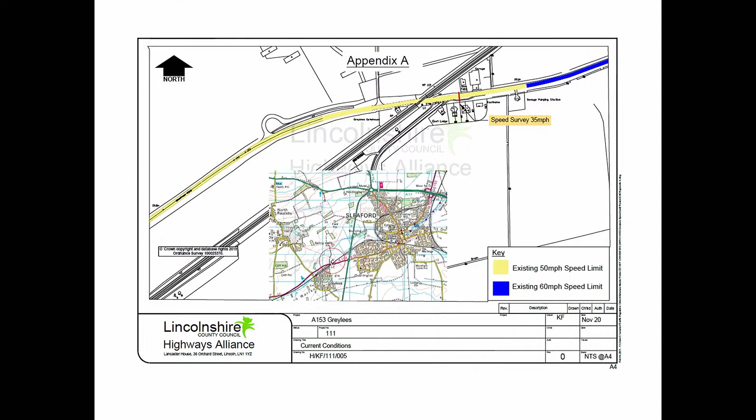Members and the previous committee may remember we brought a paper in February to look at a borderline case for this 30-mile-an-hour limit, where we'd established a mean speed of 35 miles per hour. This committee approved the 30-mile-an-hour limit as shown at Appendix B as a borderline case, and we subsequently went out to consultation. We received one objection to the proposed 30-mile-an-hour limit, based on feeling that the limit was inappropriate for the area, that additional signing would be in the area, and also that it would be too short to enforce.

In response to that, we've been able to justify this 30-mile-an-hour limit against both the rural policy and via the mean speed. There's been a number of accidents here, and we hope that this 30 will reduce the incidence of these. The signage will be limited, as we're not permitted to use 30-mile-an-hour repeaters in a street-lit area.

I think it is the minimum length required for police enforcement. So the recommendation in the report is that the committee overrules the objection so that we can advertise this proposal.

Thank you. As always with the committee, I assume that members have read the reports prior to coming to meetings. One or two questions might have been asked at various points, so it does help people with the decision making. I don't know if anybody wants to speak to the reports. I'll just have a quick look round. I can't see anybody burning to make their maiden speech. So from the chair, then, I'm going to propose that we accept the report as printed.

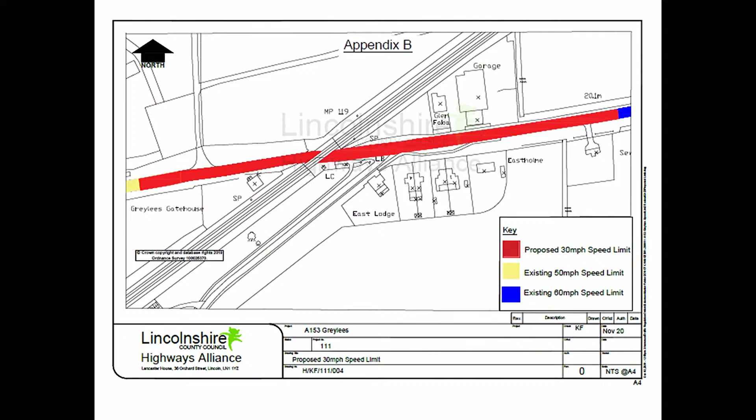Chairman, I'm happy to second that. Thank you very much, Councillor Pepper. I am healthy. Allegedly. Okay, thank you. So it's now seconded by Councillor Pepper.

I will therefore put it to the vote. All in favour, please show now. A quick look round shows that's unanimous, but I will ask if there is anybody against or any abstentions, just for the sake of completeness. Thank you. So that's all for that one.

So I'll move you on to the next report, which is 4.2, Tattershall Thorpe, the B1192, a proposed speed limit reduction on pages 19 to 26. We're just going to revive the PowerPoint presentation in the chamber. So there's a little pause here.

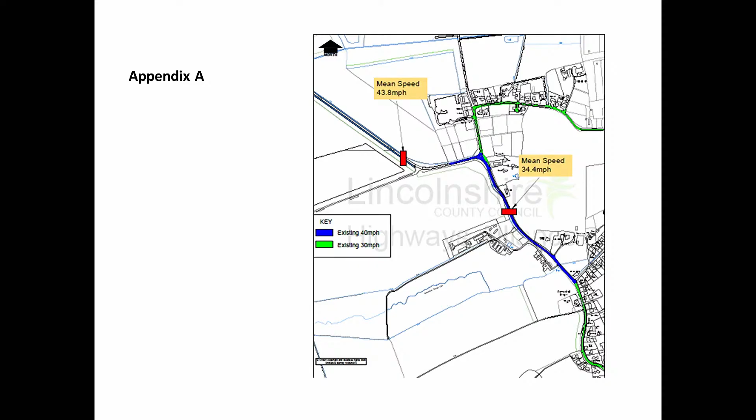So we're proposing that the existing 40 is reduced to 30 and the existing unrestricted length is reduced to 40. This will be subject to the approval of this committee. So the recommendation is that the committee approves these reductions as borderline cases so that we can proceed with the consultation. Thank you very much.

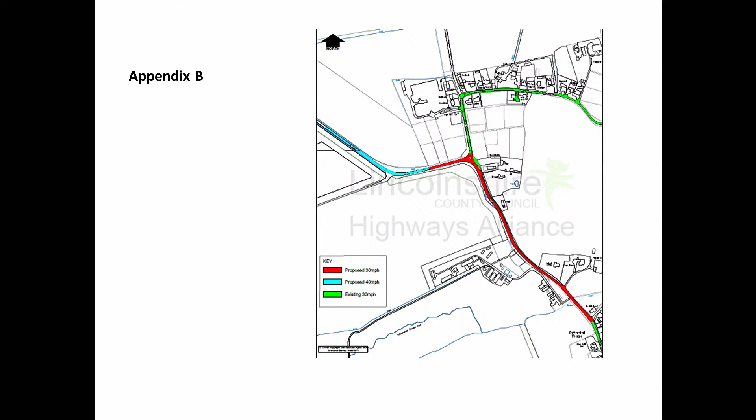So I'll open it to committee. Vice Chairman, would you like to speak to this one? Yes, thank you very much. I think this is an incredibly welcome proposal that we have on the table here. I am the local member for Tattershall, and I appreciate this is something that has come up from time to time with the local communities there.

It builds on the work that we've already done looking at linking the speed limits at the south of the village and just tying all of that up so that speed limits genuinely make sense, that you're not constantly yo-yoing. Looking at the way that this works as you come in from the north, slowing that traffic down as it approaches those first bends with that quarry access there, I think makes an awful lot of sense, and I'm very happy to move the paper, Mr. Chairman.

Thank you. I represent an area adjoining your area, and I know this road very well, so I also can support this speed limit reduction, so I'm quite happy to second. However, would anybody else like to speak to the report?

Councillor Reid. Thank you, Chairman. Just like you good people, I'm very familiar with this particular area, going to Woodhall Spa, and I would just endorse exactly what's being asked. But I think it's good for us to be able to debate that we do actually know the areas that we're actually voting on. Thank you.

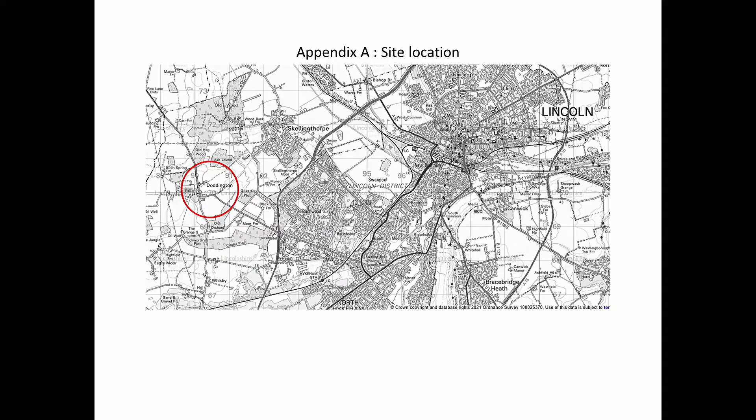This is a proposed puffin crossing at Doddington Village, which lies just to the west of Lincoln on the B1190. We had a request for a toucan crossing at this point. Doddington Hall is a very popular venue. It has an overflow car park across the road, which is very well used, and this generates quite a lot of pedestrian traffic across the road.

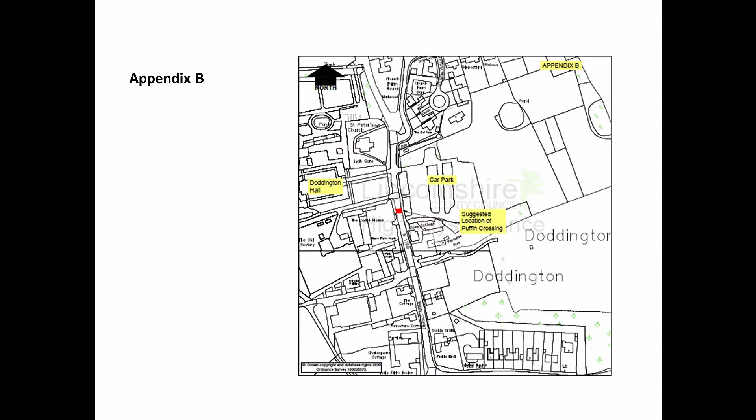So, following an initial assessment to identify the desire line, we identified this location as being the most likely place for a crossing facility and carried out the necessary survey. The survey result came in at 0.47, which just falls short of the 0.5 required for a pedestrian refuge. However, in the policy, members are able to sanction an installation if the score lies within 10% of the threshold required.

This being the case, a pedestrian refuge can be approved by this committee. However, there is insufficient space in the carriageway for a pedestrian refuge to be constructed to current standards without significant widening of the road, which will entail a lot of extra cost. So this committee is, in those circumstances, able to sanction an upgrade to a zebra crossing. However, at this location, the traffic flows are too high for a zebra crossing. So again, this committee is able to sanction an upgrade to a puffin crossing, which is push button variety, and therefore that is what is proposed at this location.

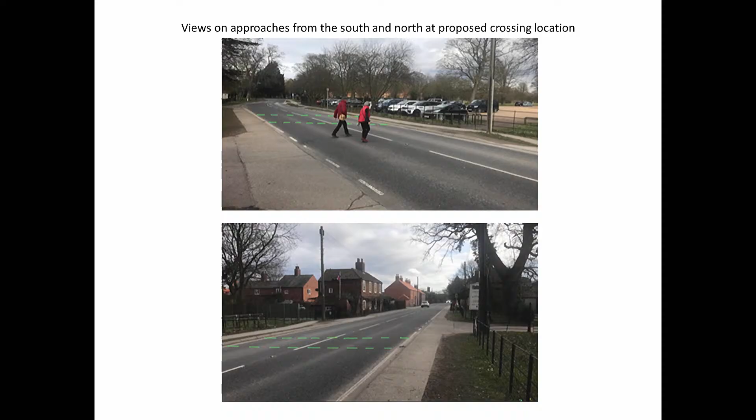So the recommendation is that the committee supports a bid for funding for the feasibility, design and installation of a puffin crossing at this location. Thank you. Thank you very much. I'll therefore open it to committee. Would anybody like to speak to the report? Councillor Reid, please.

Thank you very much, Chairman. Well, this is really good news. I'm sure there are many other people in this room campaigning for similar situations in different locations. But clearly we can see the advantages of having an upgrade to a puffin crossing or zebra crossing from a pedestrian refuge. It clearly makes great sense, and I think it's just a really good news story, and I'd encourage other members of a similar mind to recommend this. I think it's excellent, and I'm really, really pleased for this community. Thank you, Chairman.

I've seen this location both as a driver and also, I don't think I need to declare an interest, as a customer to Doddington Hall when I've been to various events at the establishment. I've seen the traffic coming through, so I've seen it from both a pedestrian aspect and a driving aspect, and I wholly support the recommendation. It goes forward, and that the consultation can be pursued with regard to this, so that the funding bid can be put together for the feasibility study.

Councillor Mrs Newton. Thank you, Chairman. I'm happy to second this recommendation. It looks as though it's good news all round. Rather than me second it, I thought I'd allow you to. Yes, no problem. So, would anybody else like to speak?

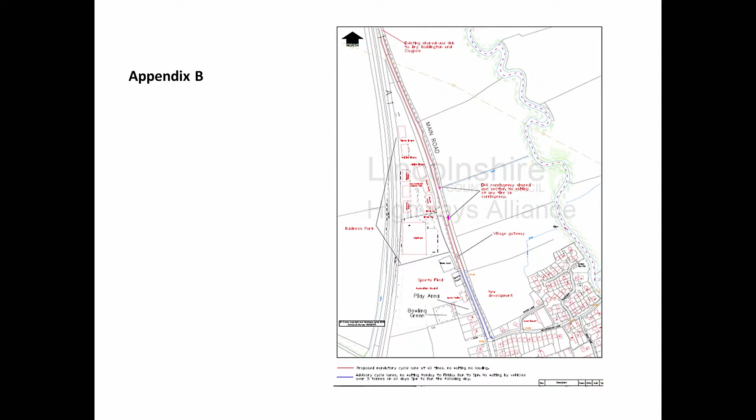Good morning, thank you Chairman. Yes, I'm speaking today in favour of the proposals that Jan has brought to the committee. The details of the scheme have been developed in close consultation with both the Parish Council and the Playing Field Management Committee, with an on-site meeting last year to agree the details before we went out to public consultation.

Importantly, the single yellow line that Jan referred to, proposed outside the sports facilities, will ensure that evening and weekend parking for visitors to those facilities is still possible. For daytime users of the facilities, parking would be possible south of Westborough Lane, which is only a short walk. However, the Parish Council and Playing Field Committee are exploring options for a limited number of off-street parking spaces in the future, so hopefully that reassures members about some of the objections.

As well as improving cycle links to neighbouring villages of Claypole and Dry Doddington, it also improves and connects the village to Newark Town Centre, which is our nearest town. And there is, of course, the added bonus that it will remove the dangerous overnight lorry parking from the north end of the village. Now, we have suffered for well over a decade 20 to 30 HGVs every night parking along the north end of the village and leaving high levels of litter and human waste in our village verges.

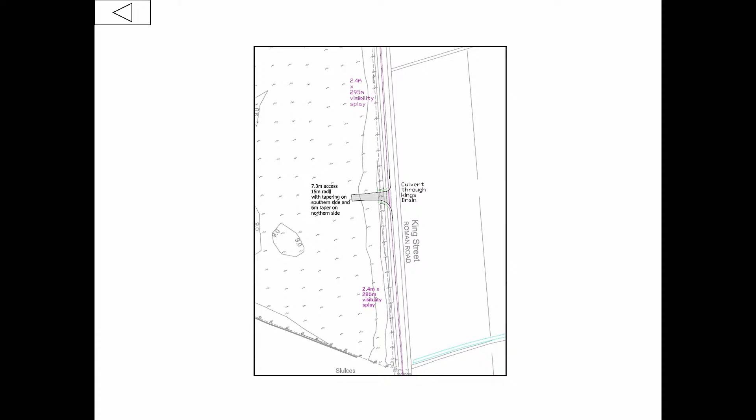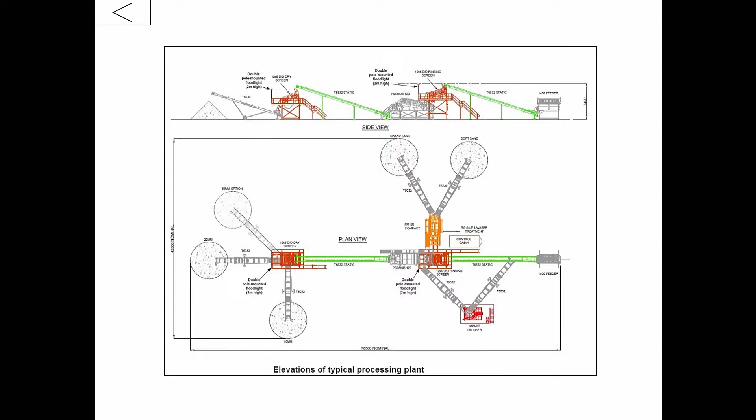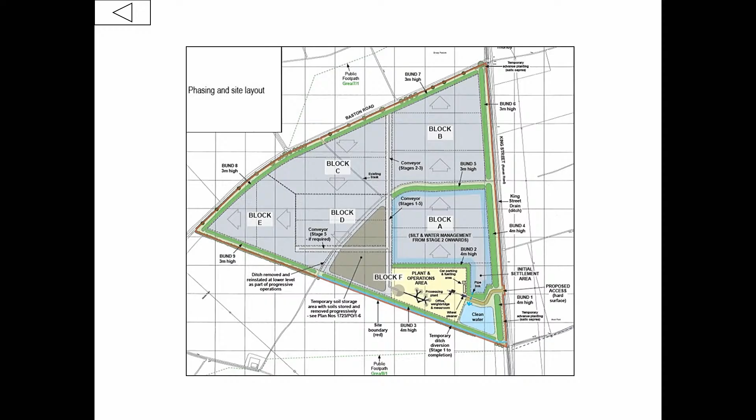In terms of publicity and consultation, I haven't got the page numbers on my report, so I'll refer to the paragraph numbers. Paragraph 14 sets out the results of the consultation and publicity, and you'll see at 14B that Greatford Parish Council have raised a number of objections to the application, in particular regarding traffic and safety along King Street, with their detailed concerns set out in the report.

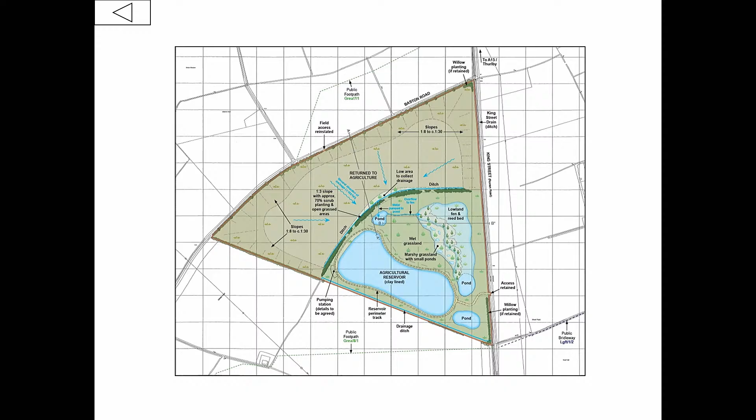Moving on from there, Barholm and Stowe Parish Council have also raised concerns about the traffic on King Street, and even with the additional information that has been provided, they still maintain their original objection. Following on from there, there's a list of other parish councils in the locality who also have made comments regarding the application.

Moving on, after the various parish councils identified in the report, you'll see that the Environment Agency have raised no objection to the application, subject to an informative. Importantly, the highways officers have confirmed that following the submission of further information, the highway officer requests that any permission granted by the planning authority shall include conditions relating to highway improvements, access, HGV cleaning, and also routing, and the inclusion of an informative regarding a requirement for a section 278 under the Highways Act for improvements to King Street.

I think I've highlighted the main consultee responses, the ones you need to have particular regard to. If we move on to paragraph 16, you'll see that we've received a total of 179 representations to this application, and 162 of those have raised objection. Again, without going through the details of those objections, they are set out clearly in the reports for you to see.

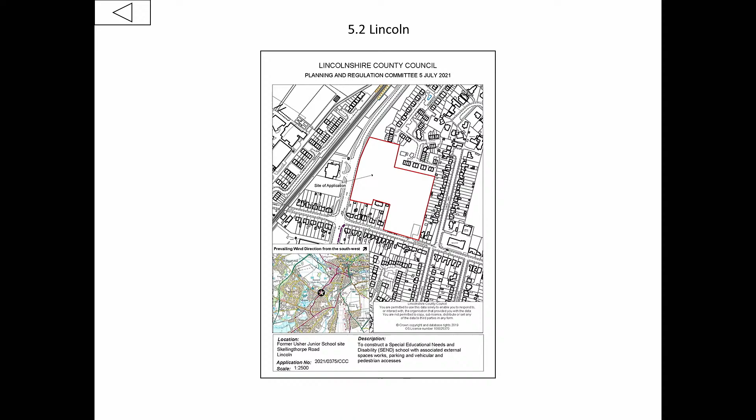Okay, next slide, Neil, please. So this gives you an overview of the proposed layout. You can see that the site comprises areas of playing field to the western extent, the school set back, which is the white block in the northern aspect, over the large car parking area, and the playground to the south.

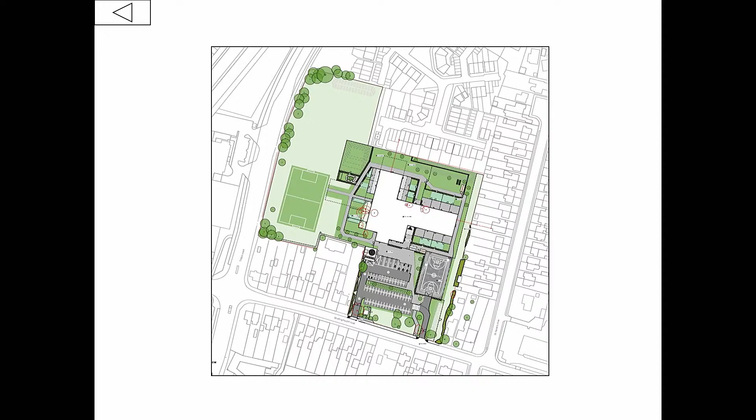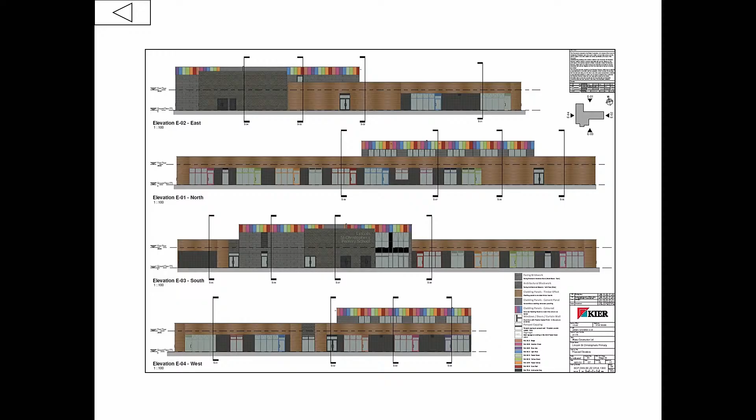Next slide, Neil. This gives members an indication of the type and design of the building. It's a modern building which comprises both single and two-storey elements, the tallest element being around 7.8 metres to the parapet, with a palette of different modern materials proposed throughout the building. Next slide, Neil, please.

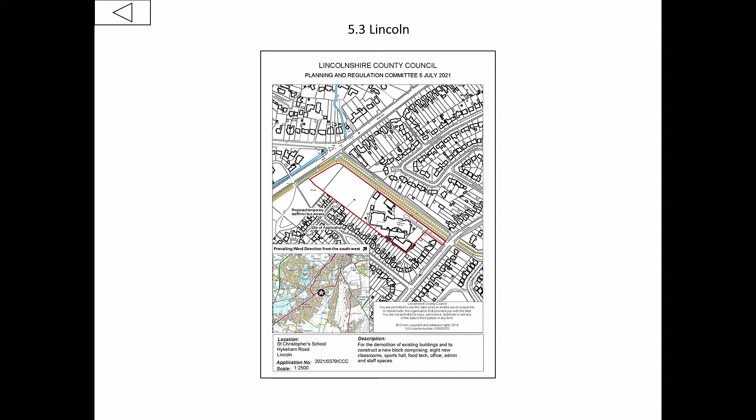Next slide, please. Yeah, this is a proposed layout again. You can see a bit more detail about the existing and proposed arrangements. Again, you can see within this development the white block in the centre, that would be the new building block, with areas of parking created and a MUGA just into the northern boundary there.

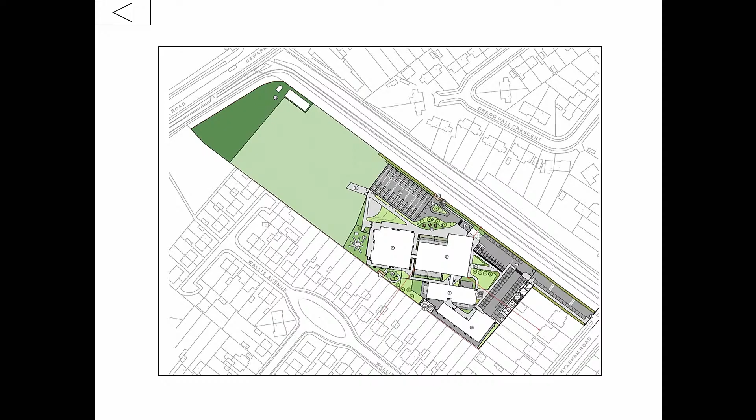Next slide. The main block itself is a two-storey element, so would be up to 8.8 metres high for the main building. There is a stairwell block you can see on those elevations that takes that small element slightly higher, about 10.3 metres high in total. The block itself accommodates a number of different facilities in terms of classrooms, but also including hydrotherapy pools, therapy rooms and specialist treatment rooms.

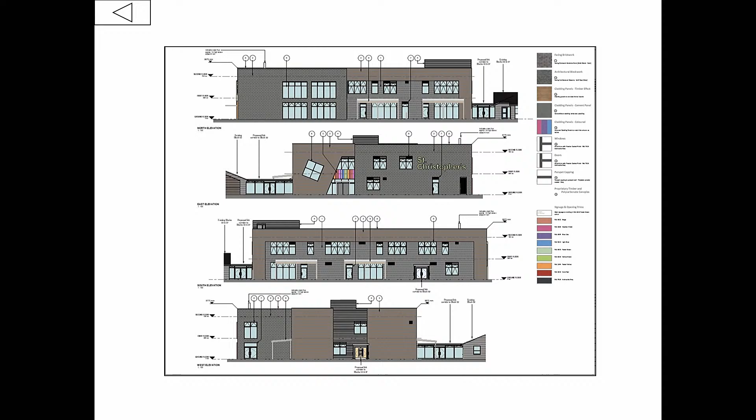So in terms of the report, as part of the development there'll be a redevelopment of the site to provide increased parking to accommodate staff, and reconfiguration of the parking areas currently in place. The school itself would be operational during any redevelopment, so it's been necessary to segregate operations whilst construction takes place, necessitating a temporary parking area for staff and entrance for students.

If you just go back one, please. Entrance here off Wallis Avenue, and then a temporary construction car parking area - if we can move on, please, into the playing field space here.

In terms of consultation responses, no statutory consultees have objected to the proposal. We notified around 162 neighbours bordering the site, and received 6 representations, 5 of which are objections set out within the report. I don't propose to go through those in detail - I'm sure members have familiarised themselves with those, on page 171 and 172. We've also had a petition of around 12 signatories raising issues about the development.

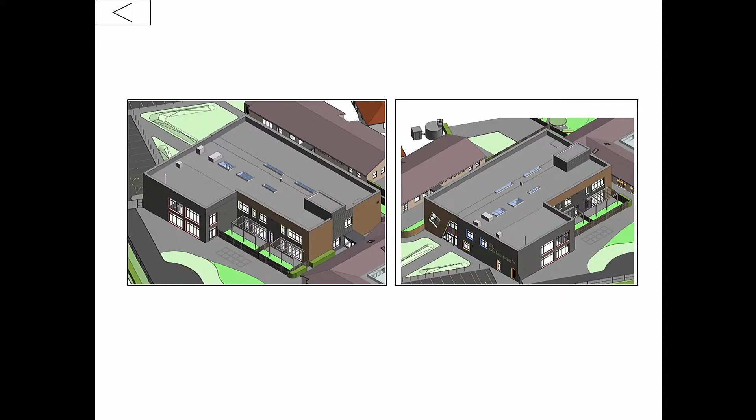Thank you very much. We have no public speakers to this application, so I'm going to open the debate. Who would like to be my first speaker? And seeing none - I think we've talked to this site previously.

Vice Chairman: I was just going to sustain the point I made in relation to the previous application, that this seemed to be a well thought out development. It's pleasing to see it's looking at being two-storey. Too often the construction of schools seems to sprawl like an ever-expanding bungalow, taking up ever more field space and car parking space. So actually I can see the sense in going two storeys with this. I'm more than happy to support the paper, Mr Chairman. I imagine colleagues may have similar concerns regarding car parking, and looking on my screen at Google Earth, this does seem to be quite a cramped site, but I'm satisfied at paragraph 18 on page 164 that, similar to the previous application, this has at least been reflected in the text of the report.

Thank you very much, Councillor Ashley Morris. Thank you, Chairman - same again, I'm afraid. Page 172, amongst the objections - and I appreciate many of them are a bit 'not in my backyard' - there obviously has been an issue in the past with this site, because someone commented that yellow line marking has only made the situation worse. I've found exactly the same in various areas in my division: yellow line marking, while commendable for the people it directly affects, simply moves the problem on to someone else.